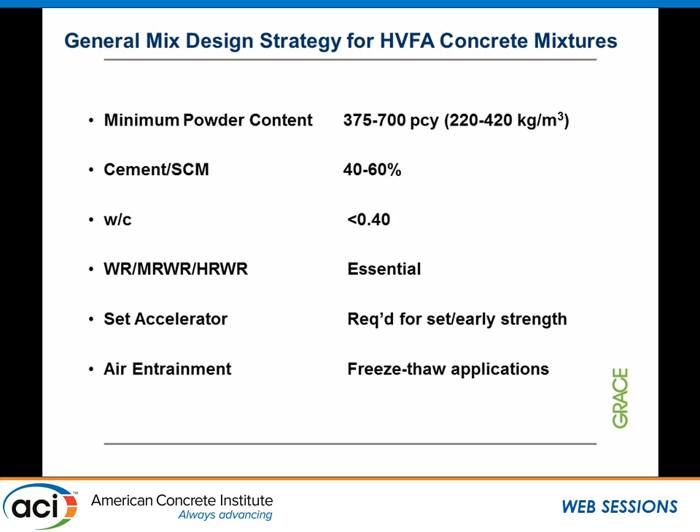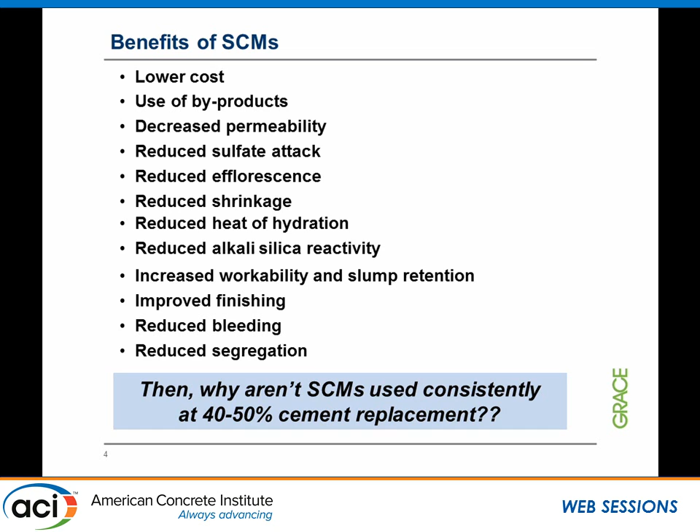So you want to ask yourself, there are so many good points about using of SCMs in terms of increasing durability, lower cost, better sustainability. So why aren't they consistently being used at this high content of 40 to 50%? So once again, we're going back to, in terms of performance, retarded set, strength development, particularly in cold temperatures, and I'll show you some examples of what we're talking about. Inconsistent air entrainment. The first three really are things that I think we can address with chemical admixtures.

And as Katifa talked about, the specified mix designs and shortages of quality materials. These are things that many of you have to deal with, but at least I offer you some solutions that I hope will help us to move from the 18% to the 25% to the 40%.

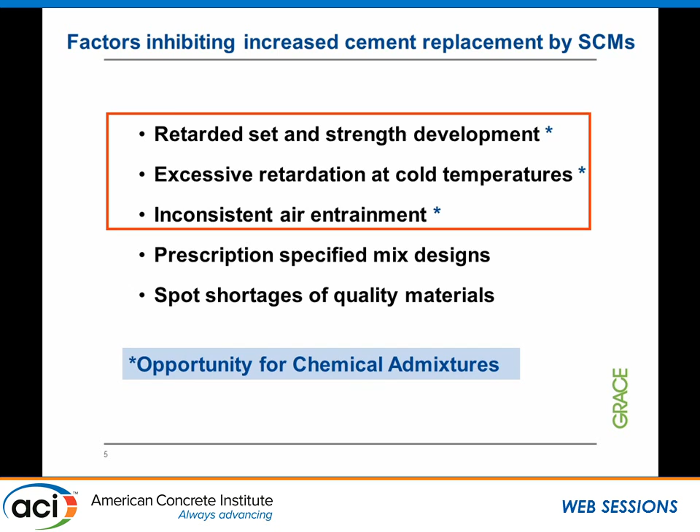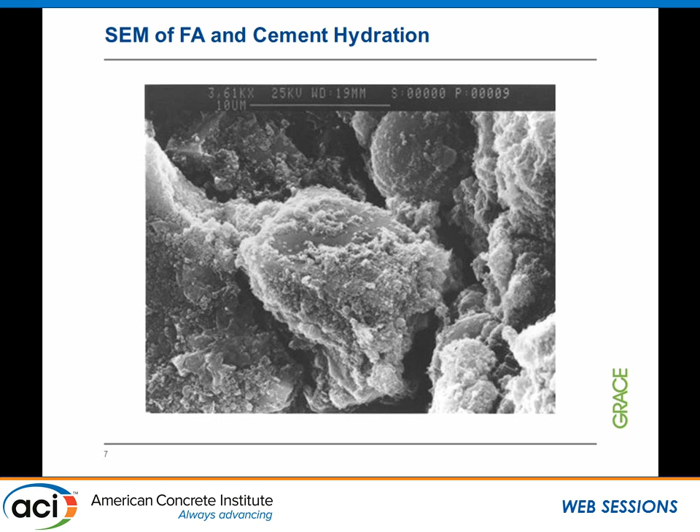So in terms of the challenges of setting time and early strength, many of you have looked at the picture of the SEM where we are looking at the cement particle versus the fly ash particle. This is a one-day picture where you see a lot of hydration products being formed on the cement particles already, but barely much on the fly ash. And therefore, it is the addition of these fly ash that we don't have the hydration products. Therefore, we get the lower set time and lower strength.

Here is a paper that was given by Yijin talking about setting time influence with the increase of fly ash. This is not type C fly ash, it's just a name of her fly ash, which is an F ash. At 40% increase or replacement level of fly ash, you can see the set time already doubled. And when you're doing this experiment, sometimes at temperatures lower than about 10 degrees Celsius, you can even see the set time increase to about 20 hours.

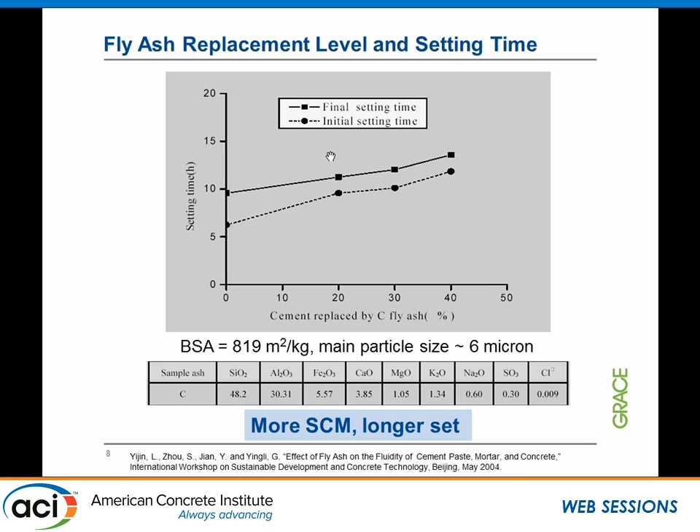So what do we deal with it? How do we deal with it nowadays? In some places, for example here, we show you an example of Austin City. How they deal with it is, in hot weather, they allow for higher replacement level. And in colder temperature, the replacement level is really limited.

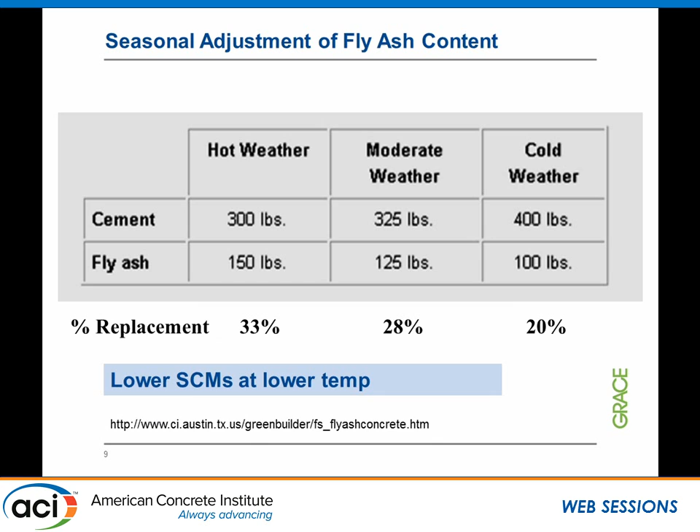And then some other things that we are looking at when we are dealing with fly ash. In this example, the group really looked at a fly ash divided into 3 different particle sizes, a coarser fly ash and a finer fly ash content. You can look at this here. This is the water reducing rate, 18% on top, and fly ash level replacement rate. The coarse fly ash here really did not give us too much water reduction level.

When using finer fly ash, you see a much higher water reduction level. The reason is that the finer fly ash has more spherical morphology, giving you a lubrication effect and, more importantly, a packing density effect, and therefore increased strength.

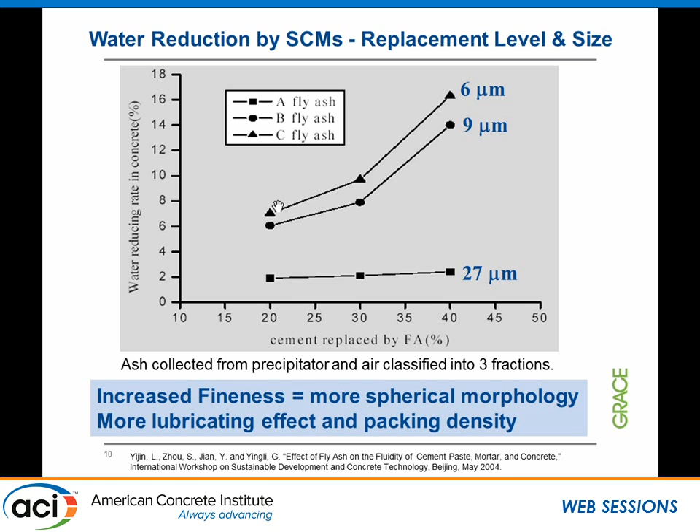I'd like to show you a series of cases using this mix design, a 708 pounds per cubic yard mix, where we'll walk through step-by-step increases in fly ash, decreases in water, and the use of different admixtures, and what they can do.

We have a baseline with a slump of about 6 inches, along with set time and compressive strength. When we added fly ash at a 40% replacement level, we saw an increase in slump by about 2 inches, but the initial set also increased by 5 hours, which isn't usable in the field, and the strength decreased by half.

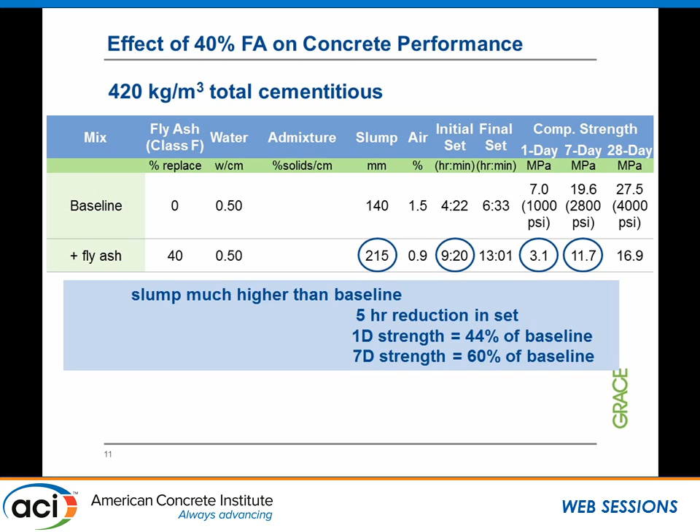What we can do is make use of the slump and reduce the water. In this case, we can cut the water by 6%. We did gain a little back in set time and strength, but still the target is not met.

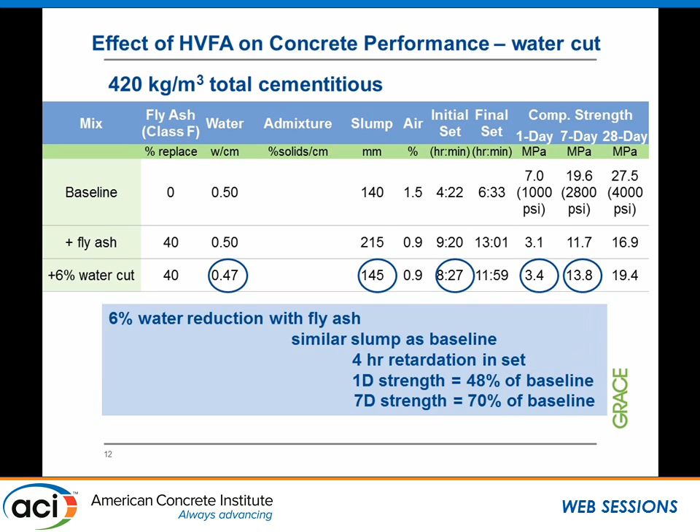So what are some options with the use of chemical admixtures, and how do we approach it? There are a variety of different chemistries we can use. We think about which chemistry gives us the least dosage to achieve the most slump.

The reason is that the less chemical you use in the mix, the lower the chances of getting higher set times. You want to maximize water reduction relative to incremental set time, have the least set time with the best slump increase, and maximize early strength.

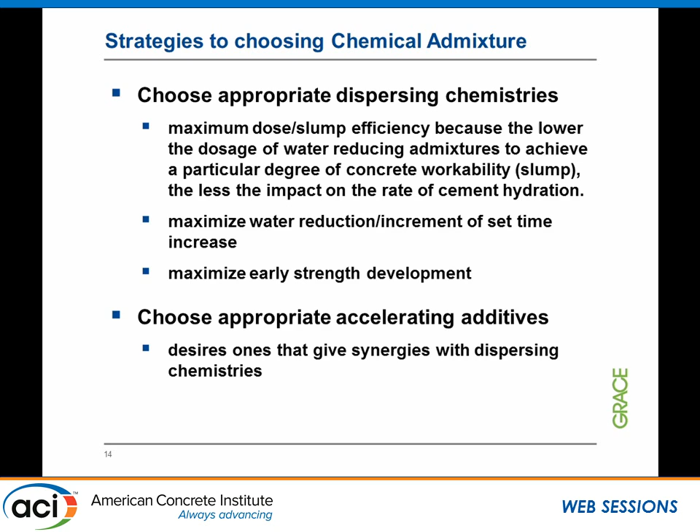This can be done by designing the correct chemistries of dispersing agents, and we also need to use accelerators in this case to help us get what we need.

This chart shows 3 different chemistries of water reducers being used. On the x-axis is the dosage of chemical relative to cement content, and on the other axis is the flow. Looking at the traditional use of lignin, as we increase dosage, lignin maxes out at about 7 inches.

In this same mix, using naphthalene sulfonate, the high-range water reducer, you can get a lot more. With the introduction of polycarboxylate, we realize we can reach that same level of water reduction or flow with much less chemical. So the criteria of using less chemical to get the most flow is demonstrated by the use of polycarboxylates.

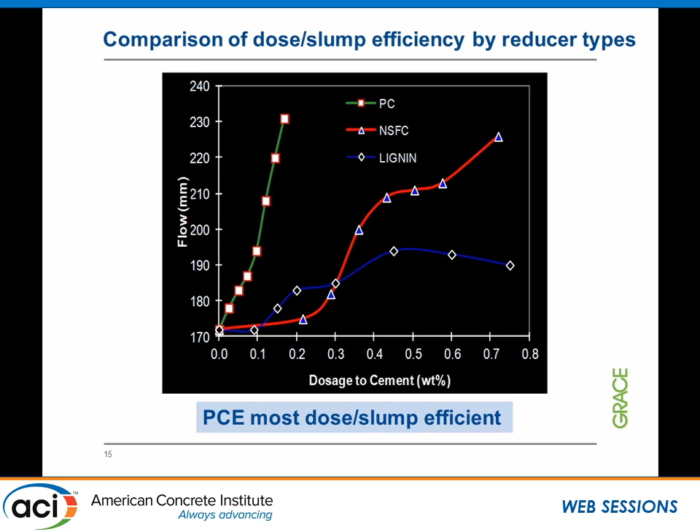Looking at a mix comparing set time versus slump with the use of corn syrup, lignin, naphthalene sulfonate, and polycarboxylate, the polycarboxylate once again gives the best slump with the least amount of set time.

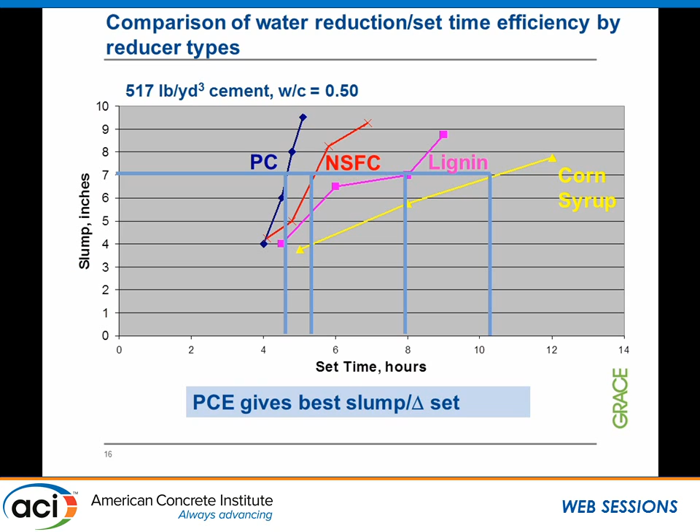So what are all the levers we can use with polycarboxylates? Polycarboxylates are copolymers that can be designed with different backbone length, teeth length, and density of teeth, and many different chemistries within this chemical.

There are a lot of levers we can use to maximize strength or slump gain, or sometimes it's not just initial slump gain but slump life. A lot of this deals with the design of these different polymers and their use to get us what we need.

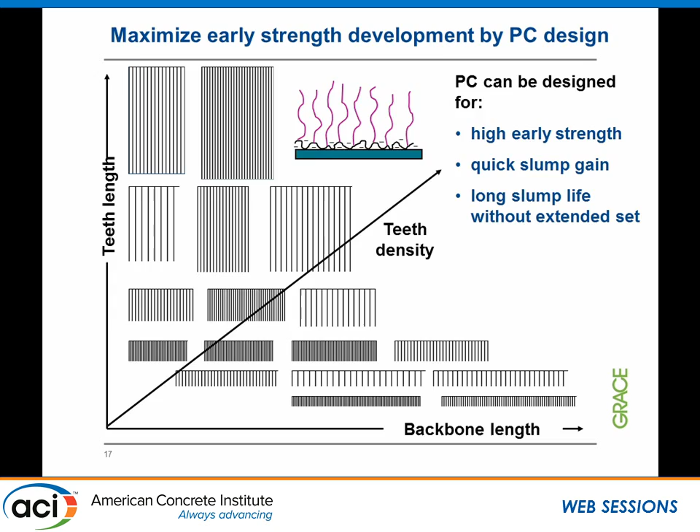Here's an example looking at a mix design using 40% slag. We're looking at a 0.15% dosage level versus a 0.11% dosage level of 4 different polycarboxylates, where we made the concrete at 72F and then cured it at 50, 70, and 100F.

This shows differences among the polycarboxylates, with the biggest differences seen at the lowest temperature and highest dosage. The cold temperature gave about a 3-hour difference, and the hottest temperature gave about 1.5 hours. In terms of dosage, this is a 3-hour versus 1.2-hour difference. So we realize there are differences between the chemical response to dosage and to different temperature regimes.

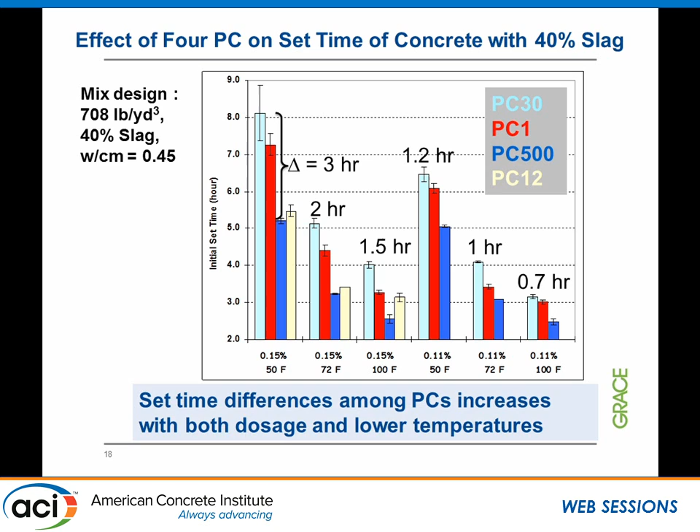And here we show you an example of slag, where we have a 16% slag level versus a 40% slag level. We picked 2 of the chemicals from the previous slide, and you can see the difference between the 2 polymers at different slag levels is highest when we have more slag in there.

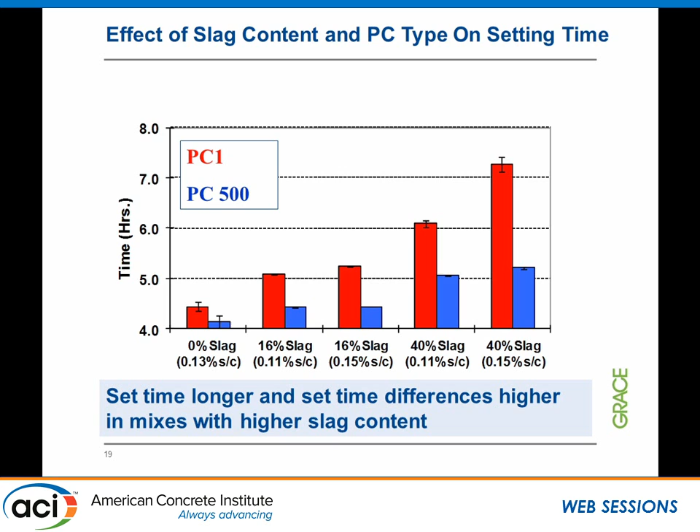So what can we do now? Obviously, we can further increase the water reduction. In this case, we use 0.13% of the polycarboxylate 500, which was the best case I showed you earlier. We can realize an 18% water reduction, so a total from baseline of 24% reduction. We gain back some set time, but still it's a 3.5-hour retardation.

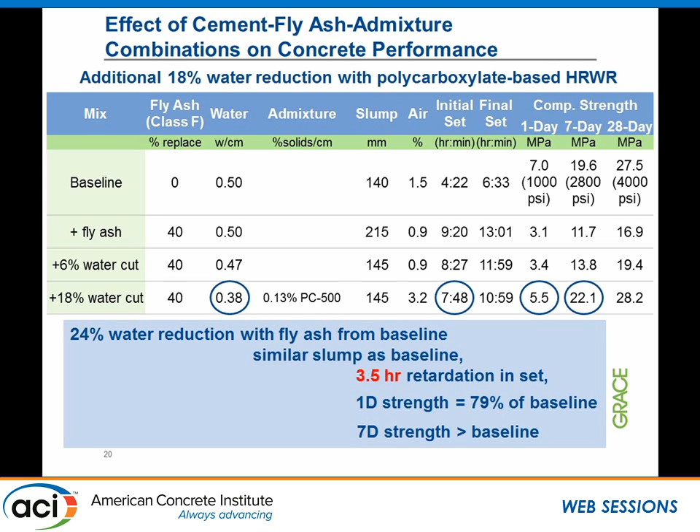In terms of strength, we are getting better. We're almost 80% of what we get from the baseline, and by 7 days, we're actually higher than the baseline. So we're getting closer and closer. So what else can we do to make this concrete meet the targets that we need?

Here we show you one example we got in the field. This is a Portland cement mix, a type 2 cement where we used naphthalene sulfonate with a water reducer in one mix versus a polycarboxylate in another mix. In both mixes, we use calcium nitrite and some air entrainer. The results here are really quite interesting.

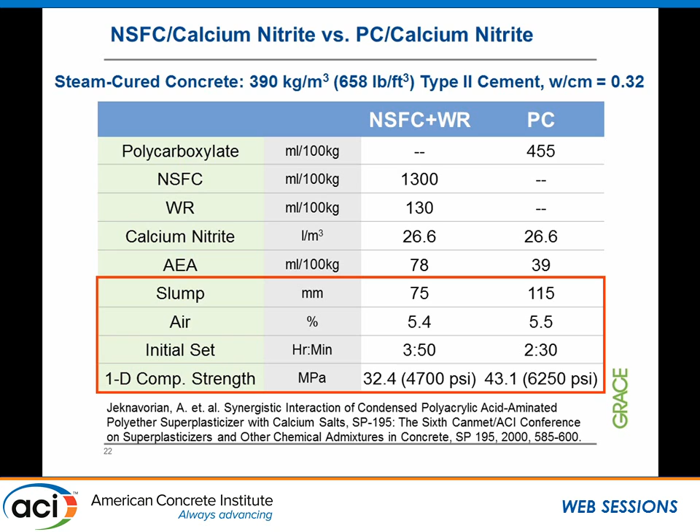In terms of slump, we got higher slump with the polycarboxylate. Air, we were able to manage at equal level with adjustment of air entrainer. Initial set was definitely a lot less when polycarboxylate is used with calcium nitrite, and we also realized a lot higher strength. So there are some synergies between the polycarboxylate and calcium nitrite.

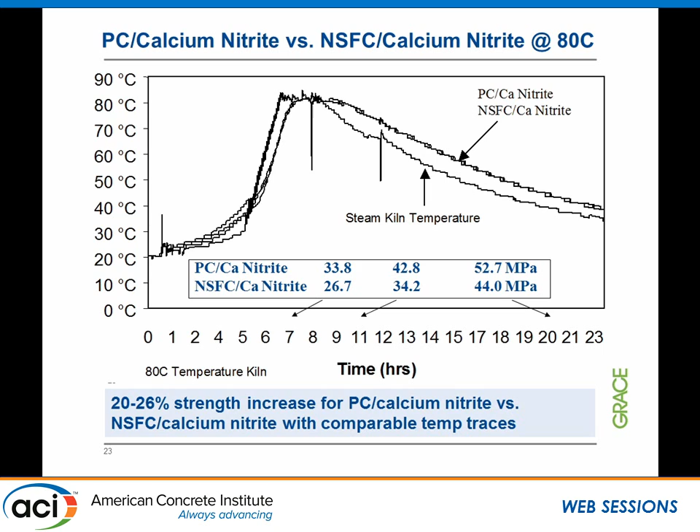So we came back to the lab and asked, is this really real, that we're getting so much strength increase in the field? We did a test with steam cure at 80 degrees Celsius. In terms of the calorimetry curve, the heat profile is about the same, but at different times you really realize the differences between the strength of the polycarboxylate and the calcium nitrite - 34 megapascal versus 27, and at about 21 hours, 53 versus 44.

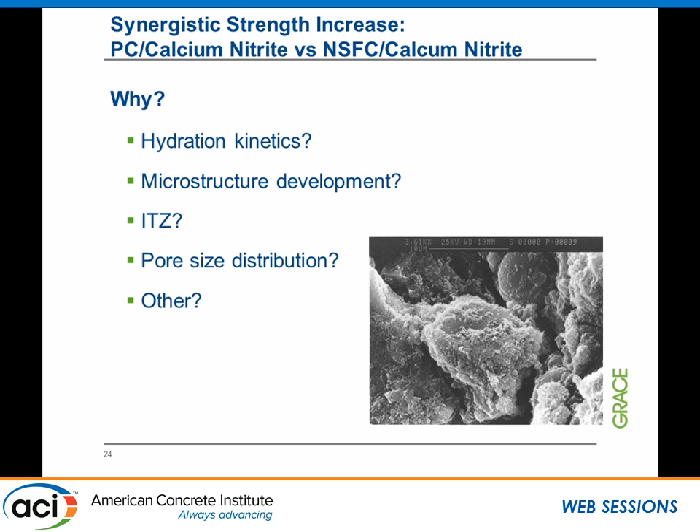So what is really going on? Are we forming different hydration products? Are we accelerating the hydration kinetics? Are we making different microstructural changes and therefore also impacting the ITZ zone? Are there differences in the pore size distribution, or are there other factors? So we took a project and looked into this.

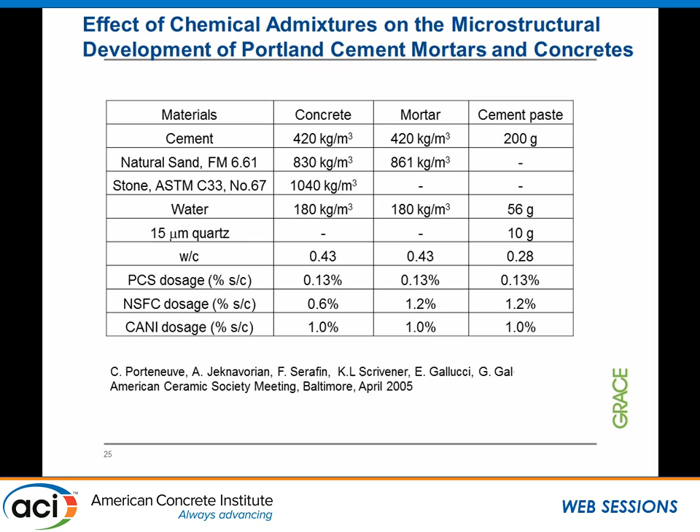In this case, it's really just Portland cement that we made into concrete, mortar, and cement paste, and did some strength tests and SEM tests to really look at what is going on. So in this case, we have the cement with the polycarboxylate, naphthalene sulfonate, and calcium nitrite. All of this was actually published - this paper was published in 2005.

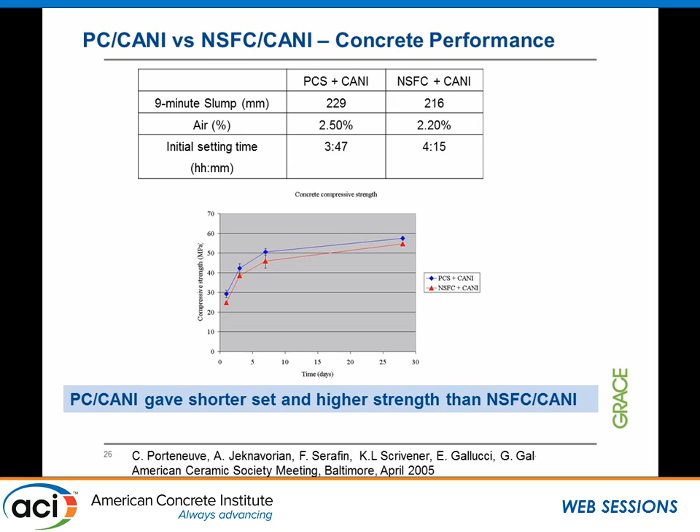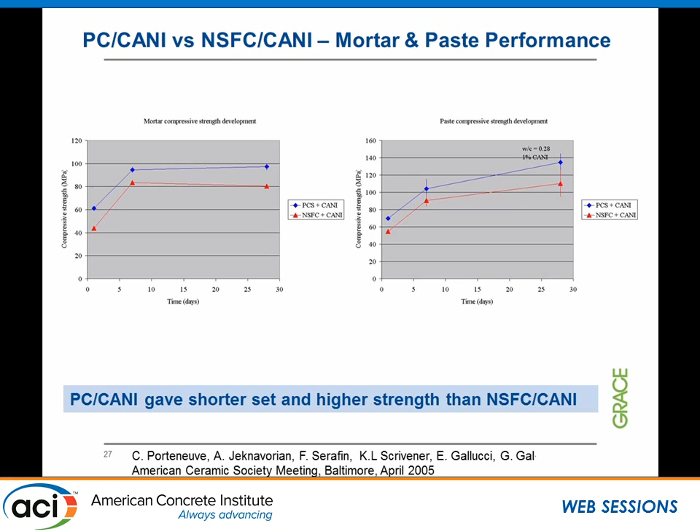This is really just to show you the system we're using when looking at something mechanistically in the mortar or paste, that it would reflect that same level of strength gain as the mixed design. So here we are looking at the calorimetry of these curves. The first one, if you can follow me, is this green one - this is the blank, a very typical blank mixed design.

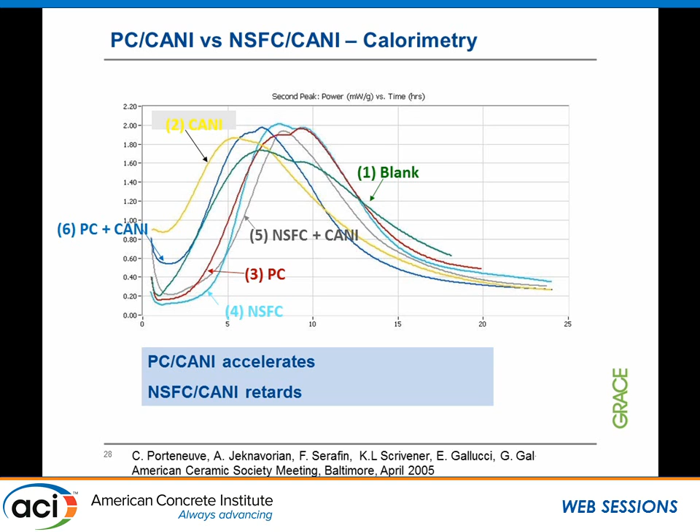With calcium nitrite, which is an accelerator, you can see the yellow - it gives you acceleration, no problem. When we add the polycarboxylate, it does give retardation from the blank, and so does naphthalene sulfonate, but not too much, it's still in a good way. However, when we add the accelerator with the naphthalene sulfonate, you continue to see this retardation, which cannot be corrected. But when you put the polycarboxylate with the calcium nitrite together, you definitely do see the acceleration.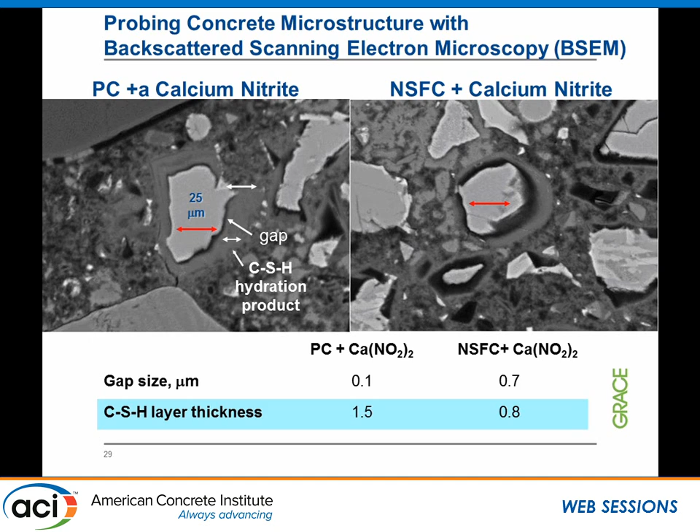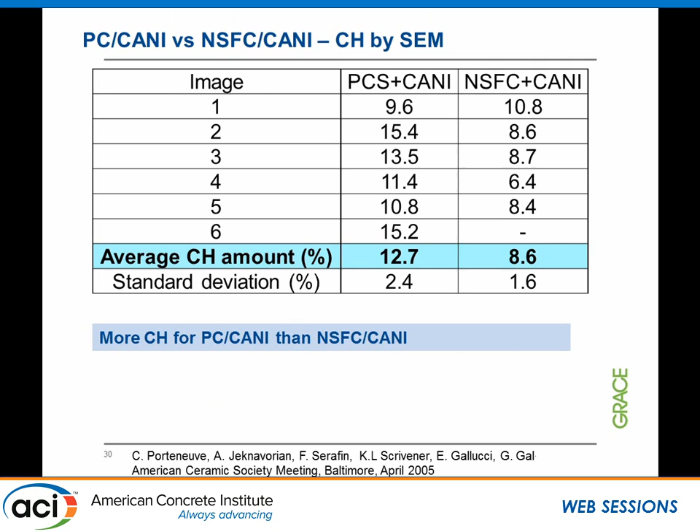Same thing when we're looking at the calcium hydroxide content by the SEM—once again, the polycarboxylate gave you a much higher amount of calcium hydroxide in this case. So what we see there is really some hydration kinetics differences importing between the polycarboxylate and the calcium nitrite. Now we want to try this with our mix that has the fly ash in it. So what happens?

Last time we were talking about this line where we added the polycarboxylate. Now we added in the calcium nitrite. We are now able to realize a set time that's very close to the baseline. We still have a 1 hour delay, but very close, with 40% use of fly ash.

And the strength also really reaching about 80% of the target. So in this case, at least for our project, we have achieved our goal and were able to use this out in the field. By 7 days and 28 days, you can see the strength is higher.

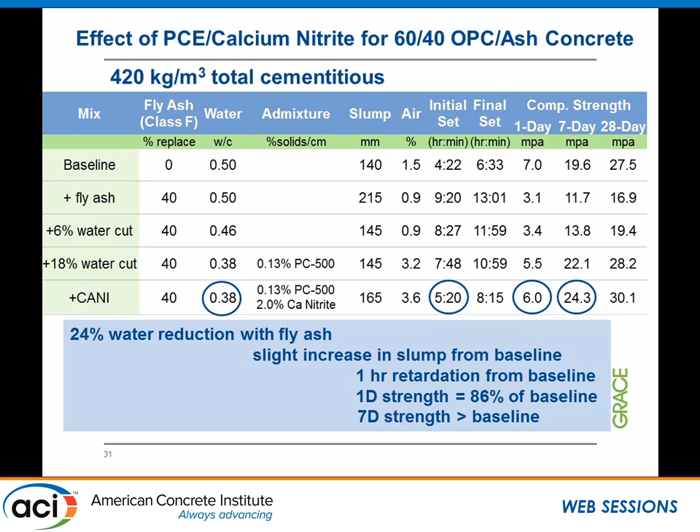So one thing to think about—there are all these different interactions between the cement, the fly ash, the admixtures. So when we tried this type of admixture with 3 different cements that have different alkali content, and also 6 different fly ash that have different calcium content, we can see that there are differences.

What we are checking is really 1 day strength versus reference, and also the set time versus reference. Our target is really to have strength be 80% at 1 day of the reference, and less than 1 hour for the initial set.

In this case, where we have the high alkali cement, we did not meet the target. When we have the medium alkali cement with lower fly ash content, we also did not meet a lot of the strength target, but getting close. But when we are looking at this area here, we definitely met the strength. So there are definitely different interactions among these.

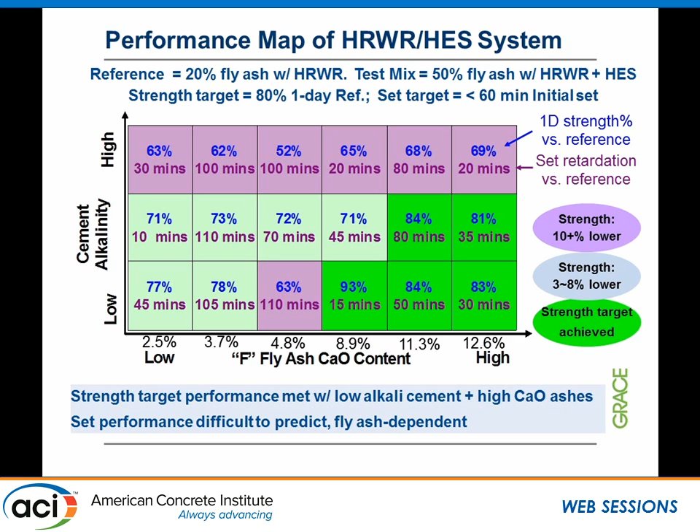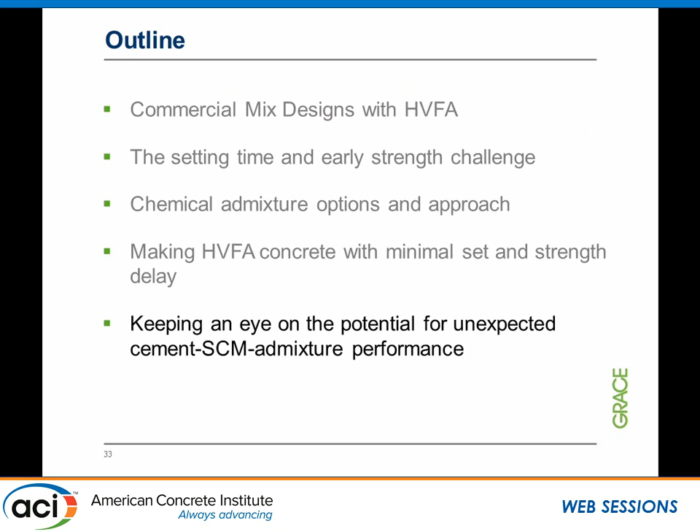And so one really has to keep an eye on the interaction of what is happening between cement, SCM, and admixture performance. And because of this, ASTM already has the calorimetry standard that really is a very, very good tool, in my opinion, when you have something new in your lab and where you have differences in fly ash coming in all the time that could give you differences. This is really a good tool to check.

And you would also be using different types of admixtures—that is critical to use. And also a subcommittee to be looking at this combination.

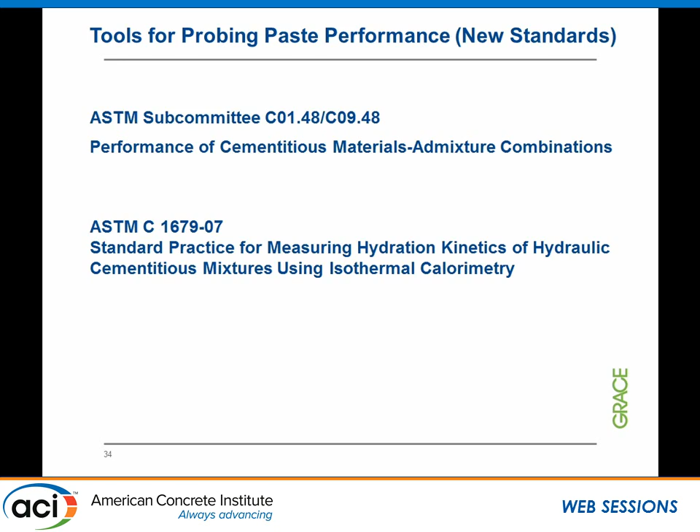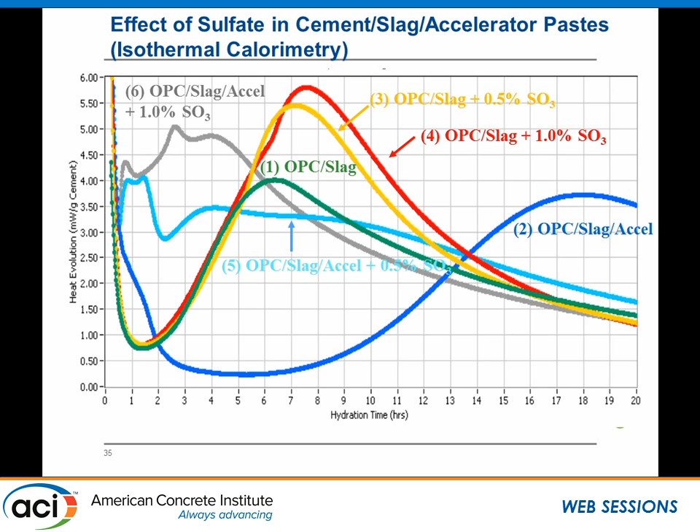So all in all, we want to present to you that the proper selection of admixture systems with the dispersing systems and the accelerators are going to be critical to enable us to use this high volume SCM.

High range water reducer through the use of polycarboxylate technology can enable the optimized use of high volume fly ash. And also, we cannot assume that an admixture system will automatically work, particularly when using high levels of SCM. We see issues with sulfate balance, we see more issues with cement interaction, and therefore the use of calorimetry really should be our friend. Thank you.